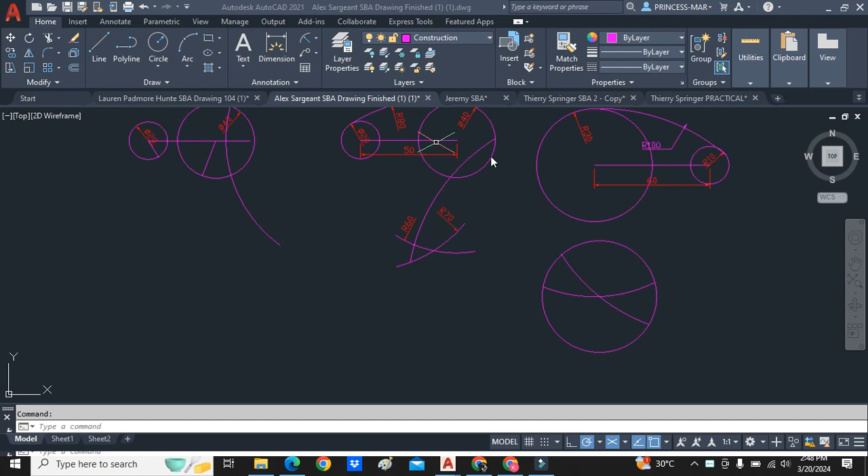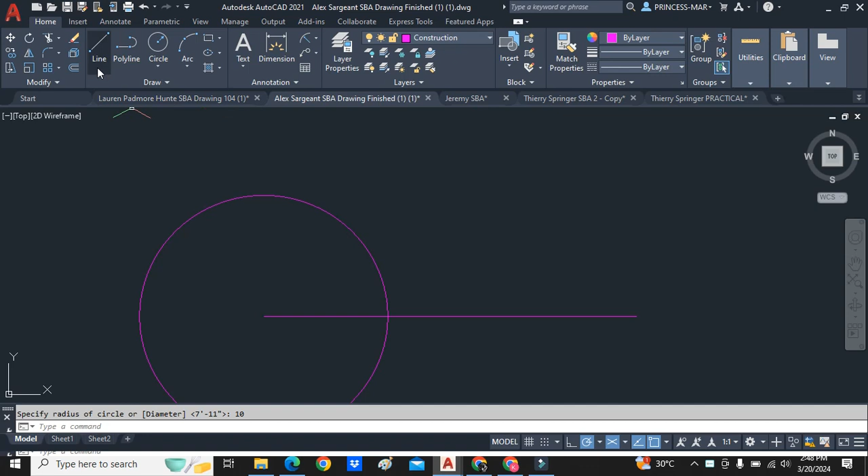In this topic, blending of curves, we're usually drawing curves to fit or touch two or more circles. So I'm going to start with a pretty simple one where we draw a horizontal line at about 30 millimeters, and then we draw one circle to the left, radius 10, and we draw one circle to the right at radius 5. So I'll just dimension so you can see.

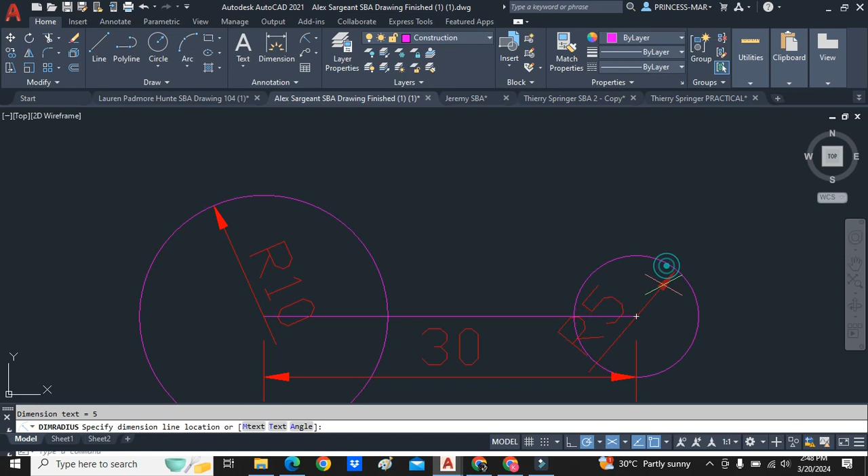So it's very important to know the dimensions of the figures that we have. So we have to the left a radius 10 circle. We have to the right a radius 5 circle. So understanding the measurements that are here is critical. If we take a look at this line, if I had to draw a line from here to here, you should know that this measurement is 10.

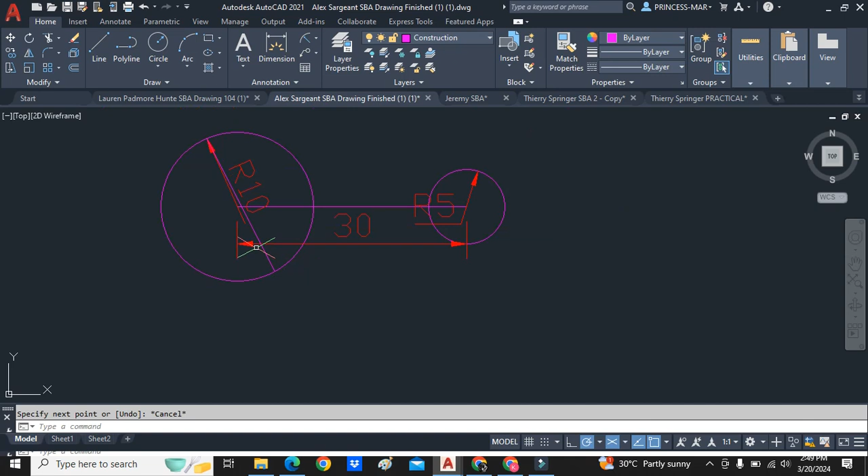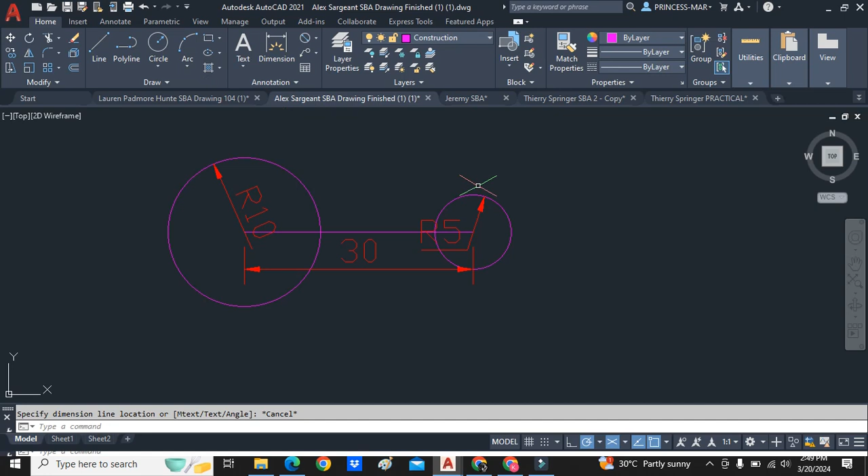However, a line from the same top area to the bottom area here of the circle should be 20. So let's take a look at that, which is the diameter of it. So if we had to do the diameter, the measurement of this circle would be 20. Now, understanding that helps us to complete the curve, which is going to touch each of these circles. Now, let's say we want a curve to touch each of these circles, a radius 60 curve. So the curve is radius 60.

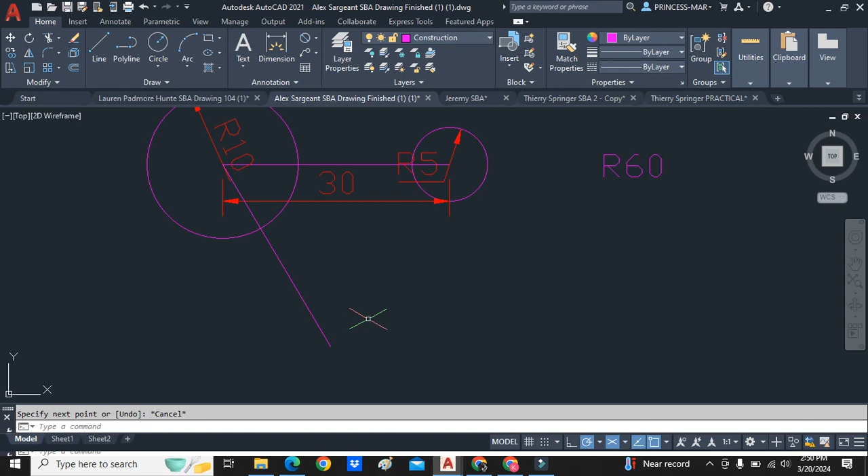Now we need to scribe an arc from the left circle down, so that when we scribe our arc up here at 60, it touches this circle flush. So that means that we need to scribe an arc from the center here down to the center of the 60. So what this is telling us is that the line from this point all the way to the top should be 60. And the same thing goes for the one to the right.

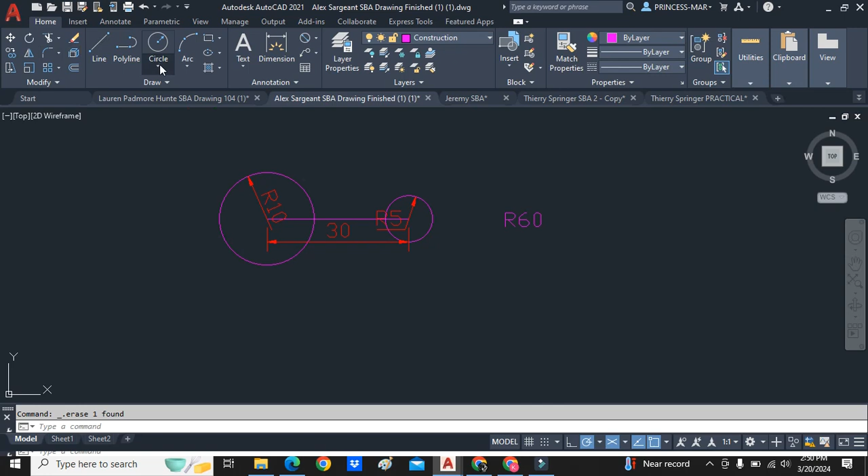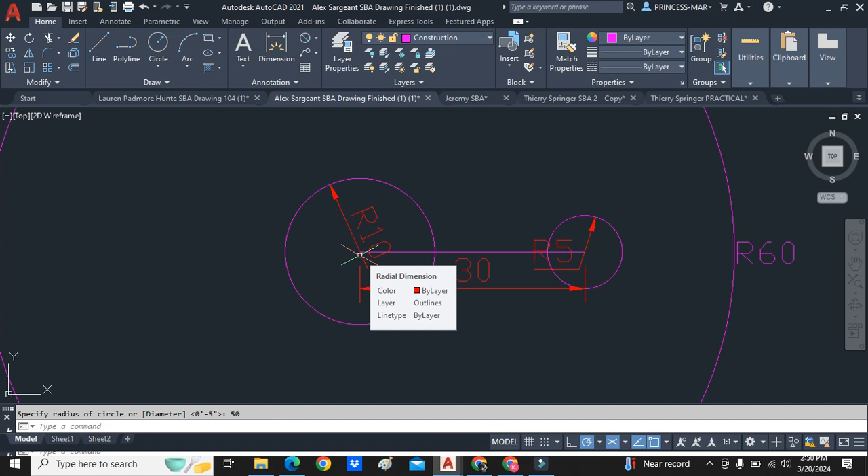The line from here, the center of the 60, should be drawn all the way to the top of this circle at 60. So what that tells us is we need to subtract 10 from 60 here. So I radius, come from the center of the circle, and 10 from 60 gives me 50. So I draw a circle here at 50. Now just to go over that again, we want to draw a curve here at 60. So I come from the center of here and I subtract 10 from 60, which gives me 50. I just drew this circle, radius 50.

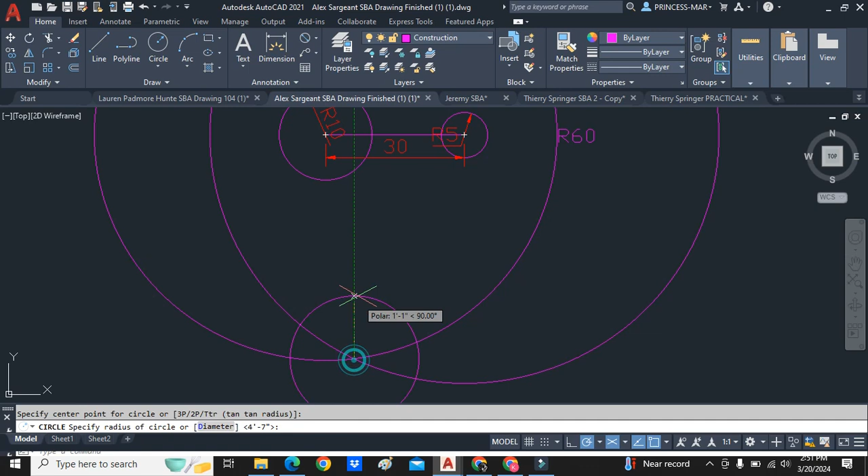We do the same thing for the one on the right. 5 from 60 gives us 55. We draw our 55. So where these two curves or circles meet at the bottom, we find the middle, we draw a small circle, and now we're going to trim. Now that we have trimmed, we have down here the center of those two arcs. We come radius, and when we draw a circle now radius 60, it touches both of those circles flush.

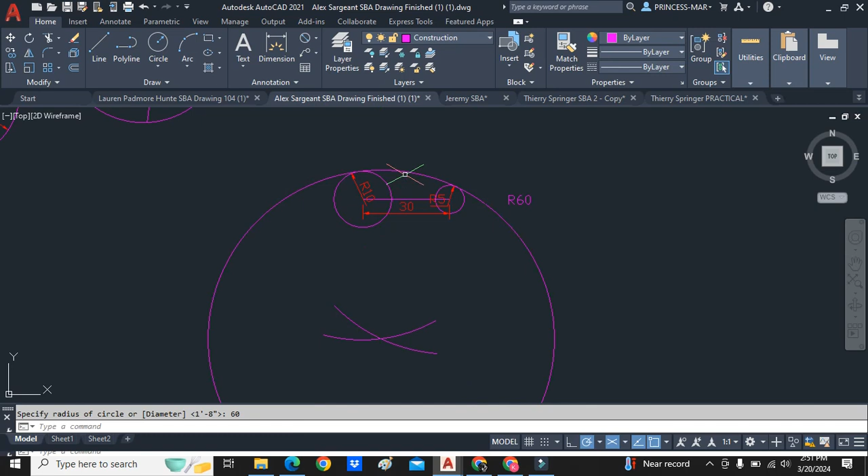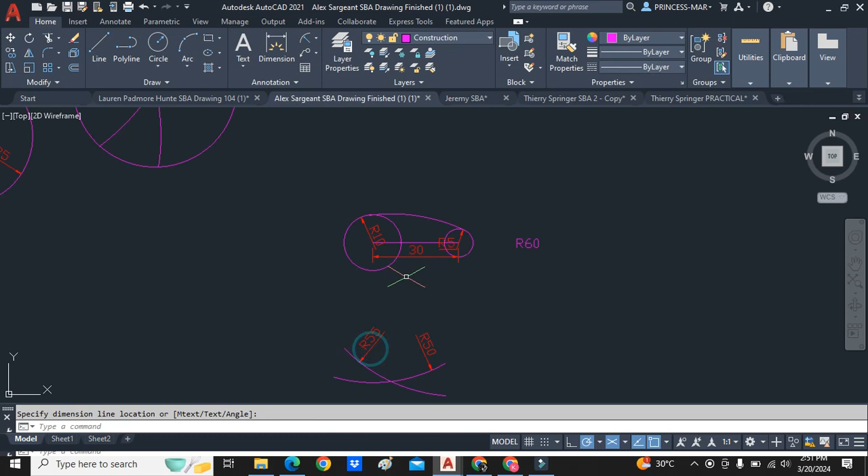So you just trim off the left side, you trim off the right, then you would come here, change it to radius, you dimension the right one, and then you will dimension the left one, and then you will dimension the circle that is in here. Alright, so that curve is radius 60. We're just going to do one more. Well, we may do two more.

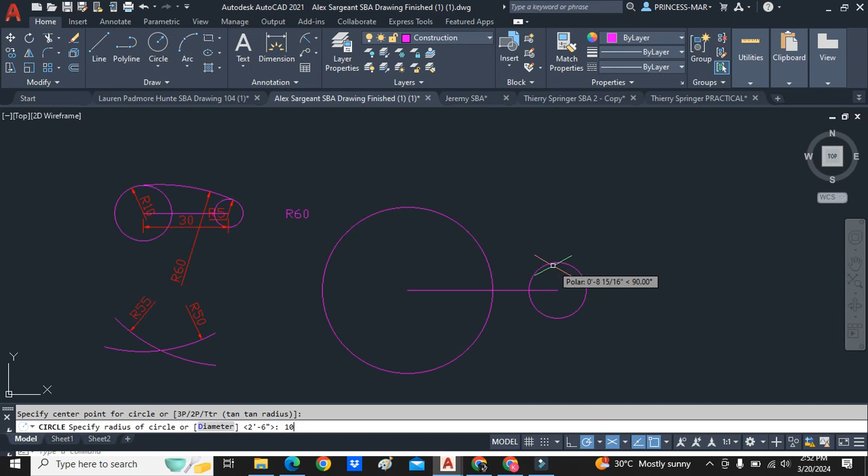So we draw a line here, and another flat line. This line here is any measurement, and this is just to show that it does not matter the measurements that are between them, but you need to draw to the measurements that are given. So I'm going to draw a circle here, radius 30, just a big circle. Then I'm going to draw a smaller circle here at radius 10. So we have two circles, one is 30, and another one here, radius 10.

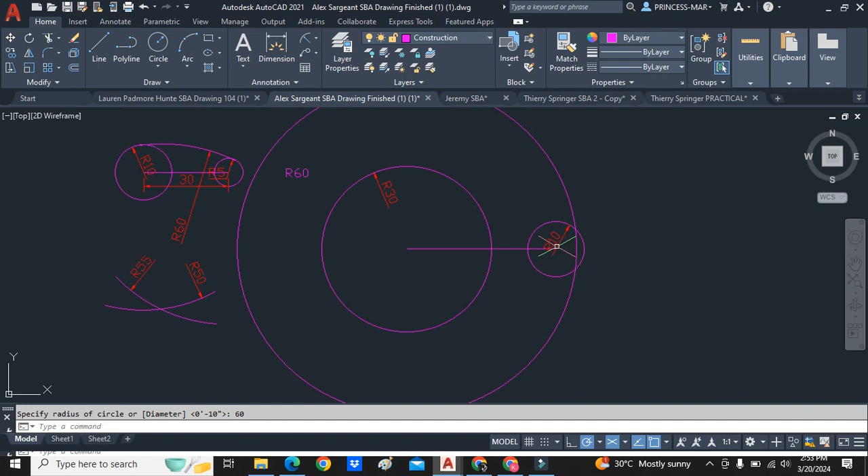So the curve that we want to put in here is a 90 millimeter curve. So our circle will be drawn at radius 90. So what that tells us is, for us to draw that circle, we need to subtract this radius from 90, which should give us 60. So we come here, radius, down here, 60. Over here is the same thing, subtract the 10 from 90, which will give us 80. And we have our center down here.

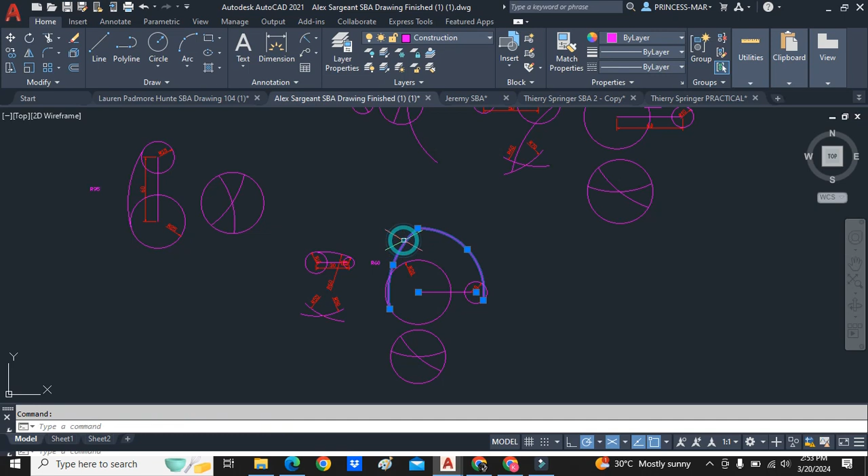So to clean up the drawing, we just come and draw a small circle and we trim. So now that we have these two measurements that we calculated, we're going to come radius and we open our compass here to the 90 that we were looking at, and that gives us our curve.